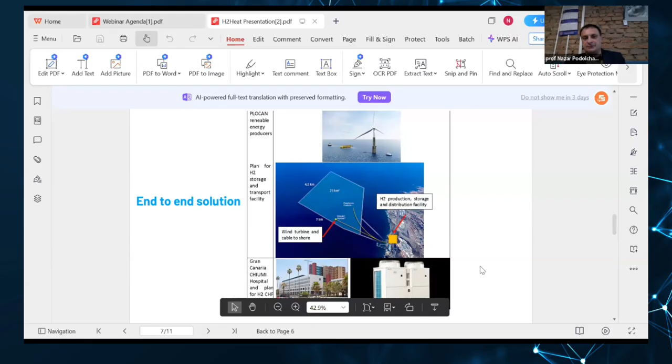What's the H2HEAT mission? The project's mission is to showcase the complete journey of green hydrogen, H2, from production to application. We are driven by a singular mission to demonstrate the full value chain of green hydrogen production and its application in commercial building heating. You see the map of this project - it's the Canary Islands, and also the hospital, this maternity hospital on Gran Canaria, and also the CHP equipment.

H2HEAT, towards a sustainable future: it produces highly combustible H2 generated from renewable energy sources, uses the H2 produced for consumption by a large hospital consumer, and establishes island infrastructure for transportation of H2 from the production facility to the end user. The location is Gran Canaria.

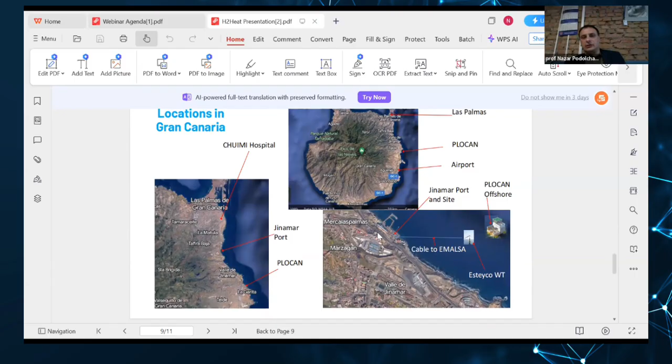You see the hospital, also here you have the island and PLOCAN offshore, and different territory and different infrastructure of this project. What's the H2HEAT impact?

First of all, it advances the European innovative knowledge base and increases technology competitiveness in the area of energy carrier production, advances the European innovative knowledge base on increased technology competitiveness in the area of the heating value chain, increases feedback use of H2 for renewable heating, and supports the EU goals for climate protection, energy independence, and economic growth.

So thank you very much. If you have any questions, please let me know, about the activities of the Scientific Park and also about the H2 Heat project.

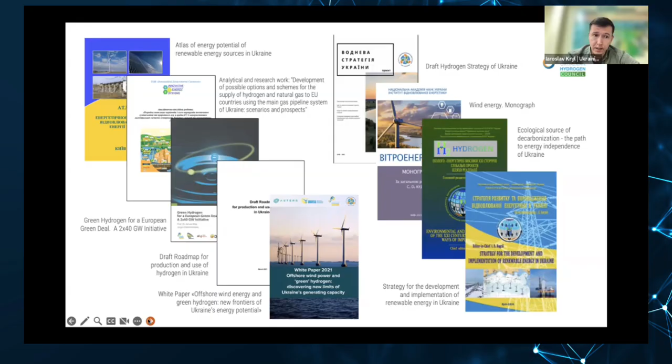This document was the basement for European Union roadmap for hydrogen development, and the basement for European hydrogen strategy regarding renewable hydrogen, where Ukraine is indicated as a main partner.

Also, our association was deeply involved in the mobility sector. In early 2021, we brought to Ukraine two fuel cell cars, and they were the first fuel cell cars which went through a complicated certification procedure in Ukraine. So currently, we're answering the question: what should be first, chicken or egg? So the next step is a hydrogen refilling station in Ukraine.

Currently these two fuel cell cars we provided to Kyiv Polytechnic Institute, Igor Sikorsky Polytechnic Institute, and Zhytomyr Polytechnic Institute, to establish a hydrogen lab based on these two fuel cell cars. And in the Institute of Renewable Energy, National Academy of Science of Ukraine, we built a demonstrative stand for how hydrogen works, how hydrogen is produced from solar energy.

Also, it's very important to show the renewable hydrogen potential of Ukraine. I mentioned that Ukraine could be a possible supplier of hydrogen with a capacity of 10 gigawatts of electrolysis capacity, but we have a huge possibility to produce hydrogen not only for European off-takers, but also for our Ukrainian domestic needs, because we have a huge gas transport system which could be adapted for hydrogen supply.

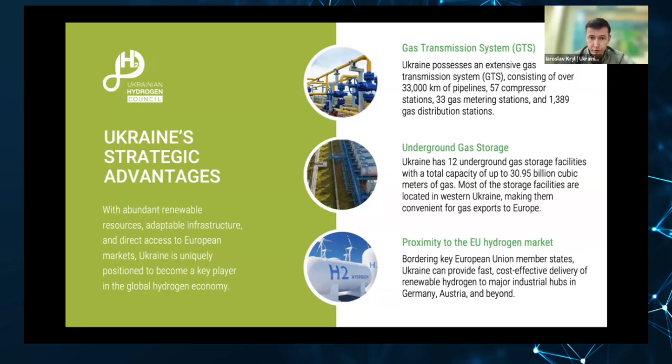We have possibilities to store hydrogen using our current underground gas storage facilities, and also we have at least 3 areas for storing hydrogen in underground saline formations.

Last year, our association was involved in developing the Ukrainian hydrogen strategy. Currently, this strategic document is published on the official website of the Ministry of Energy of Ukraine. So you see targets for our country in the middle term and long term, and how much renewables will be constructed for renewable hydrogen production.

Also, our strategy indicates that nuclear power generation will also be used for hydrogen production, because it's low carbon production of electricity, and nuclear energy is mentioned in European legislation documents as also usable as an energy source for green hydrogen production.

But when we're talking about hydrogen, it's very important to talk about hydrogen usage. As in the frame of project H2Heat, it's the ideal energy source for heating. But we also see that hydrogen is a very important energy source for the transport sector, and especially for industry.

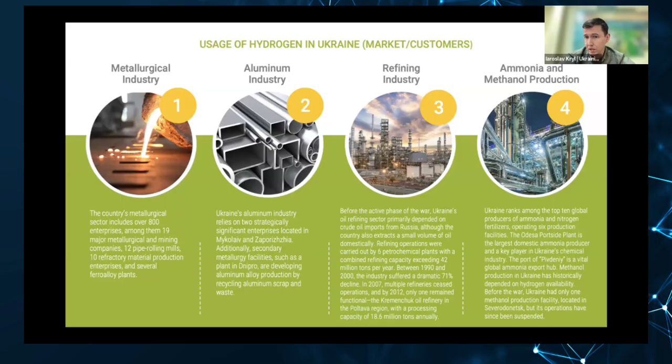Yaroslav, we can hear you. We can hear you. Yaroslav, please unmute. You're muted. I'm sorry.

Regarding hydrogen transportation, it's very important to note the strategic initiative, Central European Hydrogen Corridor. This project obtained a PCI PMI status at the end of 2023. And hydrogen transportation through the pipeline is the cheapest way to transport hydrogen - from 10 to 15 euro cents per kilogram of hydrogen for each 1,000 kilometers.

We support this project and believe that the Central European Corridor will win in the frame of competition with similar projects, and will be able to attract funding from the Connecting Europe Facility fund for repurposing the existing gas system for hydrogen supply in the future.

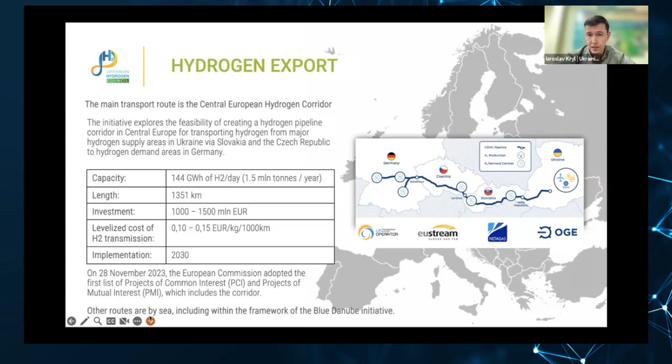Currently in Ukraine, we have several hydrogen initiatives. I am also involved in two of them. Hydrogen Valley in Zakarpattia is a project under development by the Ukrainian company Hydrogen Ukraine, and I'm also a CEO of this company. This project is a member of a Slovak-Ukrainian consortium, and this year it starts implementation, funded by the Horizon Europe program, in the frame of the small scale Hydrogen Valley topic.

The next one is Hydrogen Valley in the southern part of Odessa region, next to the Reni city. It's also under development by Hydrogen Ukraine. This project has already finalized a feasibility study for an electrolysis production plant with 3 options of hydrogen utilization: pure hydrogen, green ammonia, and green methanol production. And we believe that other Ukrainian initiatives will attract funding for project development.

As I mentioned, Ukraine's main document for hydrogen project development is the 2 times 40 gigawatt initiative, and the European strategy for renewable hydrogen. It's also important to note that in February 2022, our president signed an MOU with European stakeholders regarding renewable gases such as biomethane and green hydrogen. This allowed us to make next steps in the European area regarding renewable energy. Biomethane is already seeing several cases where Ukrainian companies transport and sell biomethane on the European market, and we believe renewable hydrogen will be next. So I tried to put all our knowledge into this short presentation.

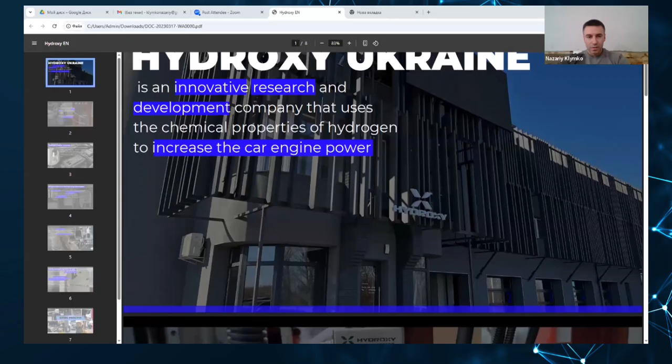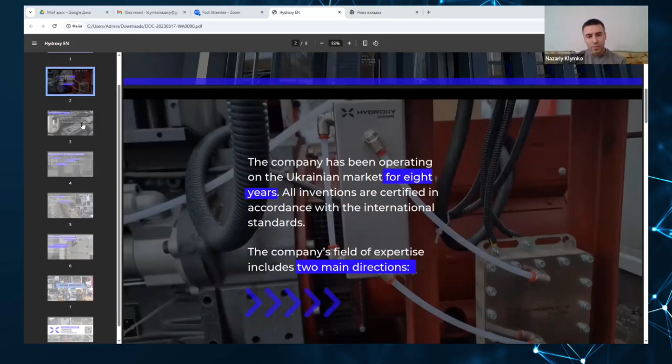I'll show you now some presentation about our systems I'd like to share. It's a small system that you can put inside your vehicle. It cleans and burns fuel more completely in the car. It's good for the environment and for fuel consumption.

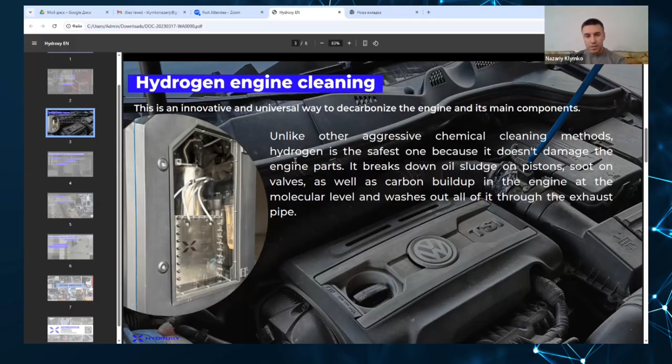Another one is hydrogen cleaning. You can clean vehicles, and it returns them to run more like new cars. We don't need to use aggressive chemical components. It takes maybe one hour and your engine will be clean. This procedure has the following advantages.

We can perform close to factory features, reducing harmful emissions into the atmosphere, reducing fuel and oil consumption by 10%, just from cleaning your engine in 1 hour. It also improves compression in cylinders and improves engine power.

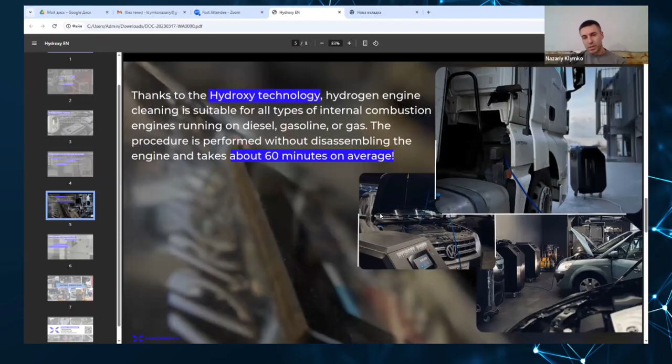Also, you can put this on trucks and buses used in cities, and it will run more smoothly with less black smoke.

We also sell our systems for small cars and for small companies that use a lot of fuel, like Post, New Post, and other companies. You can put this system inside the car. It will reduce fuel consumption.

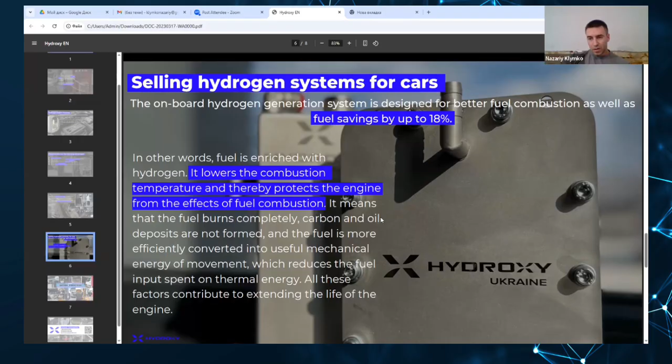Also, we're working... so now we're working with pure hydrogen.

We also have one Toyota running on hydrogen. Now we're making some experiments with pure hydrogen. We want to prepare a hydrogen generator from that vehicle. You can use it to get 114 kilowatts. You just need to refuel a tank of hydrogen, and you can have electricity and also 8 kilowatts for heating. Right now we're only making experiments with this technology, but I think in the future we will have it, like Toyota is now making something like this from their factory.

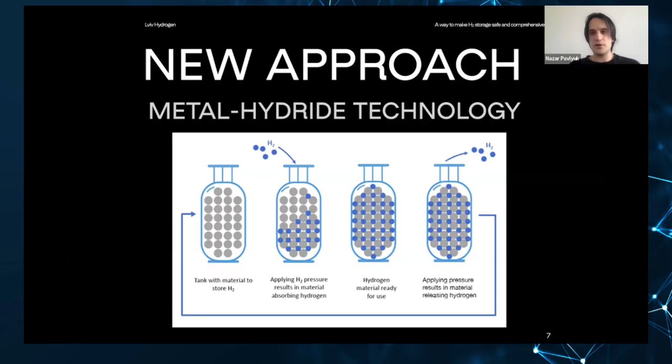Like a kitchen sponge - it absorbs water when we use it, and when we take the sponge out of the water and squeeze it, the water flows out. Here we can say we use the same concept. We've got a specialized metal alloy that absorbs hydrogen into its volume. Hydrogen is deposited inside this metal alloy, and we can controllably release the hydrogen from this alloy.

Considering why this technology is cool or good, it's because with this technology, it's more hydrogen dense. We can store 2 times more hydrogen per device volume. For example, a 50 liter tank of type 4, a gas compressed hydrogen tank, stores 2.1 kilograms of hydrogen. Using our technology, it will be 4.5 kilograms of hydrogen in a 50 liter tank.

The next thing is total safety and reliability. Given the fact that the hydrogen gas is stored inside the metal alloy, the hydrogen won't burn, leak, or explode, it's just stored in the metal. Thus, the storage becomes, not like 100% safe, but 90% safe.

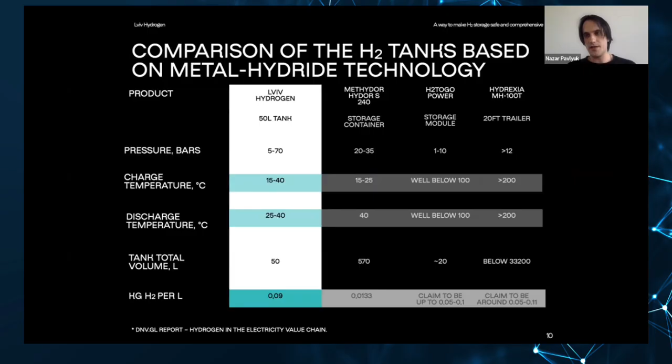There are some competitors working with the same metal hydride technology, but we still keep the competitive advantage by the fact that our technology works at room temperature. And second, it's also hydrogen dense. So we keep the parameters of temperature and hydrogen volumetric density altogether better compared to other metal hydride startups or companies.

We are analyzing the market, what we can do with the technology. We have found some market fits, and we are reaching out to people, talking to them, because we want to define the right market where we will do a pilot project, with whom, and what, so the business model hits the targets.